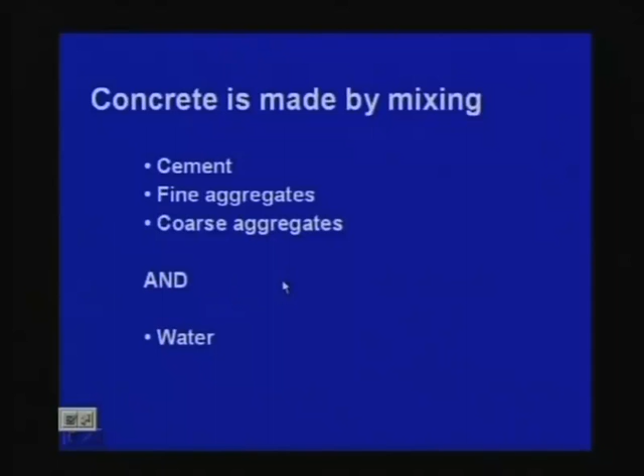As I told in the last class, concrete is made by mixing cement, fine aggregates, coarse aggregates and water, and I showed the proportion schematically: coarse aggregate, sand, cement and water. I already told this last class, just to repeat one or two slides.

We shall come to workability. This means the fresh concrete, or green concrete, can flow. You can mix it, put it in any way, and get any shape. So it should be workable. If you add less water, it will be almost dry, and you cannot get the required shape; it may simply break. If you have more water, it can flow like a fluid, and then also it is difficult to get the proper shape. So workability is very important so far as concrete casting is concerned.

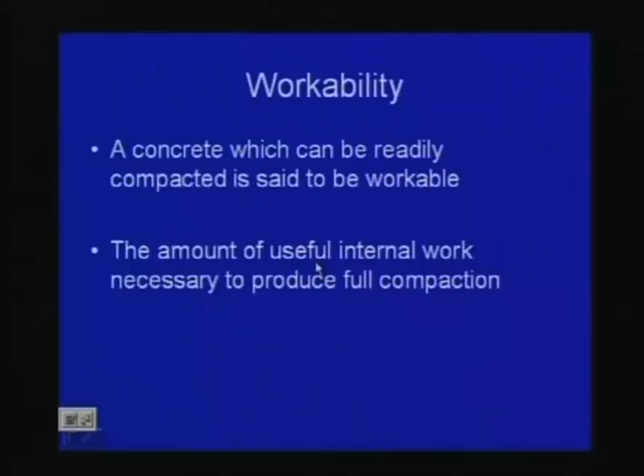So workability means a concrete which can be readily compacted is said to be workable - the amount of useful internal work necessary to produce full compaction. By useful internal work, we mean the friction between the aggregates whenever you are compacting the concrete, as well as between the aggregates and the formwork where you are placing the concrete. The amount of internal work required determines the workability.

Now according to the ASTM definition, a very standard code definition of workability: the property determining the effort required to manipulate a freshly mixed quantity of concrete with minimum loss of homogeneity. This means for concrete with coarse aggregates, you can make it so that it will be homogeneous - that one portion will not be only coarse aggregates or only sand, but the whole concrete should be homogeneous. That is the ASTM definition.

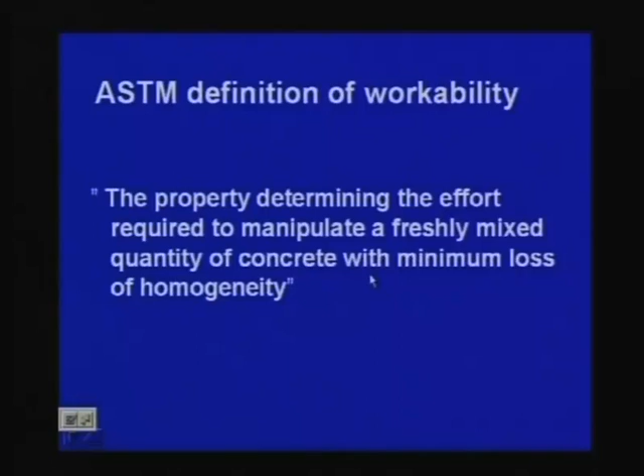We can also look at the American Concrete Institute definition. The ACI definition of workability: the property of freshly mixed concrete or mortar which determines the ease and homogeneity with which it can be mixed, placed, consolidated and finished. These are the two important bodies so far as materials and standards are concerned, ACI as well as the other one.

Let me repeat once more so that it will help you to note down: property of freshly mixed concrete or mortar - it can be concrete as well as mortar. Concrete means cement, sand and coarse aggregates; mortar means cement and sand only, fine aggregates. Mortar is used for placing bricks and for plastering, which determines the ease and homogeneity with which it can be mixed, placed, consolidated and finished. Finally you get the finished product. So that is workability.

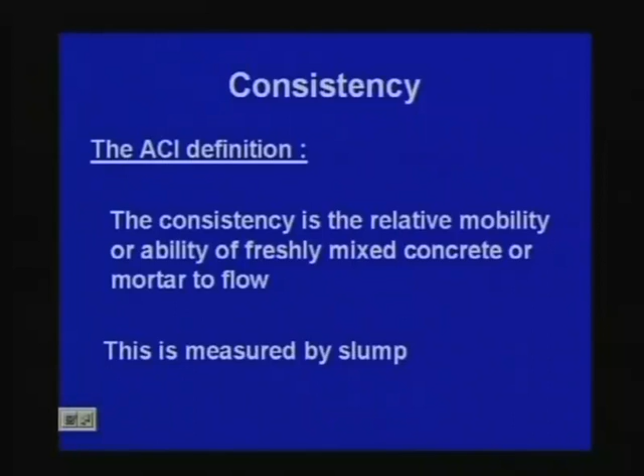So, measurement of workability by slump test is used extensively on site. We are talking about site, after all the concrete is cast on the site itself. So, we have to find out the workability from the slump, and the slump test is used extensively in site work all over the world. So, we use this particular test extensively.

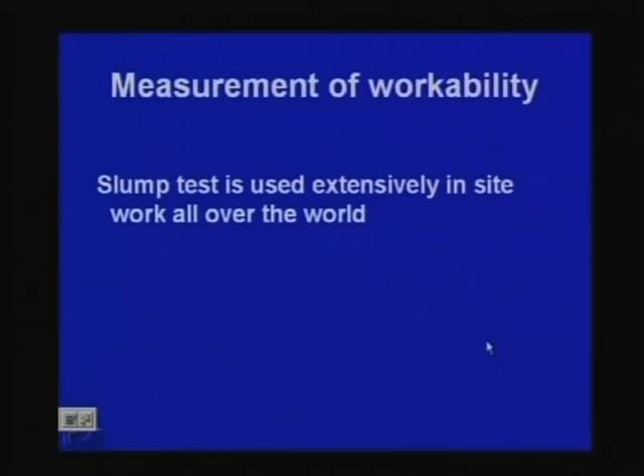So, what is the slump test? The mold for the slump test is a frustum of a cone 300 millimeter high. It is placed on a smooth surface with the smaller opening at the top and filled with concrete in 3 layers. I repeat, the mold for the slump test is a frustum of a cone 300 millimeter high. It is placed on a smooth surface with the smaller opening at the top and filled with concrete in 3 layers.

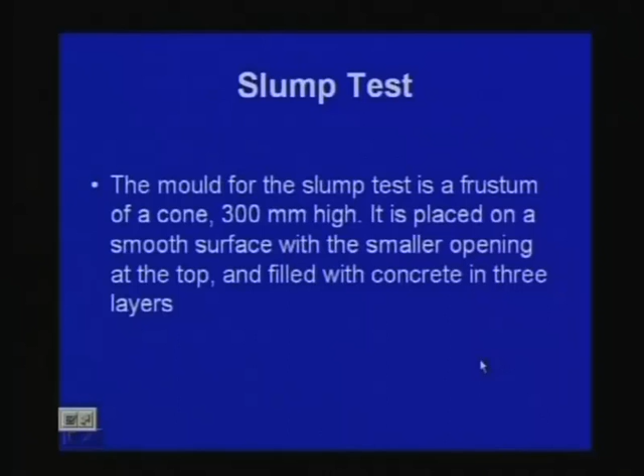This is a smooth surface, and a slump cone. You are pouring concrete through this. You have to pour in 3 layers, and we have to make 25 strokes. Each layer is tamped 25 times with a standard 16 millimeter diameter steel rod, because we have to do some kind of standardization.

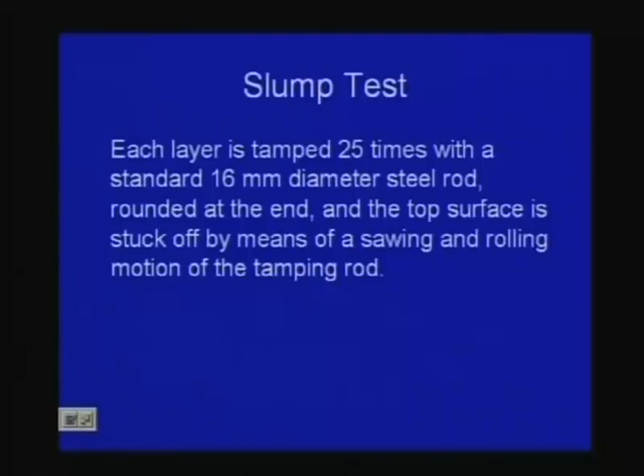On the basis of that one can design and achieve the target strength, and that could be used for actual work at site. This is not required for design, because in design we say okay M20, but before that we should know where we really stand. That is why I am keeping this class for materials. So coming to this point, we can do the slump test, and what I have already told, I shall not repeat.

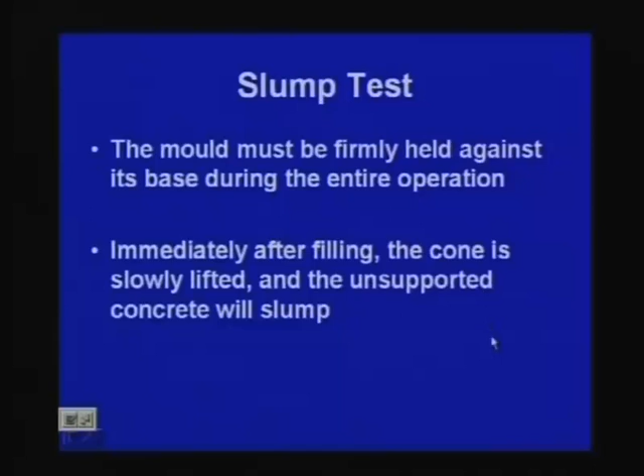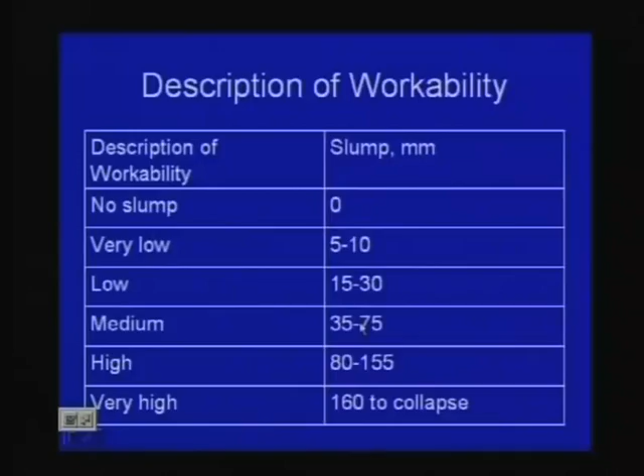So that means it is very high, obviously it is easier to work with. When it can flow, it is very high workability. So this is how we specify qualitatively, not exactly; it is not possible to get the exact value of workability, but we give the range. If we get it within this, then we consider one particular case. In other way, you can consider it as a little bit fuzzy gradation.

The other aspect is durability, because workability is one aspect, the other aspect is durability.

So, what is durability? Concrete should maintain its required strength and serviceability. Please note, I am repeating this: one is strength, the other is serviceability. These are two different criteria which go hand in hand, strength and serviceability. So, concrete should maintain its required strength and serviceability during the expected service life.

A structure is designed for a certain life, say 50 years or 100 years. So, we expect that it should be durable; at least it will withstand the load for which it is designed. Concrete is said to be durable if it withstands the process of deterioration to which it can be expected to be exposed. Obviously, the concrete cast today will deteriorate over time, we have to accept it, but even then it should withstand that, even if it is exposed to different environments.

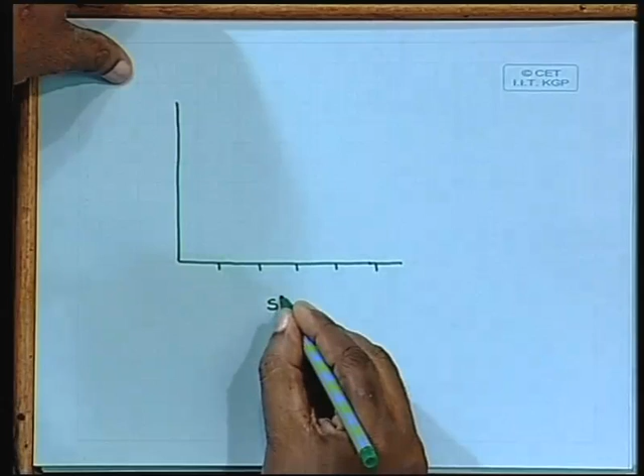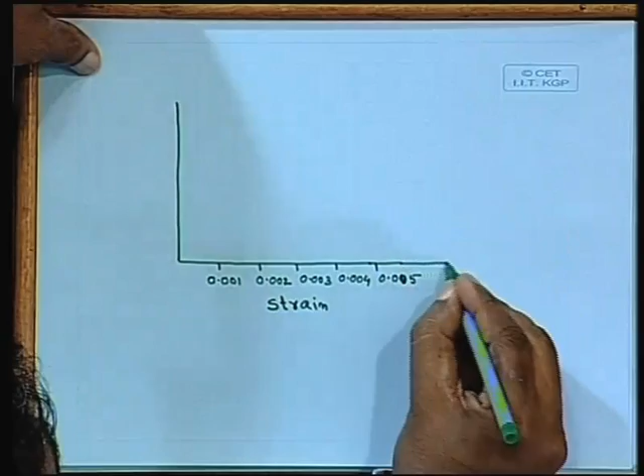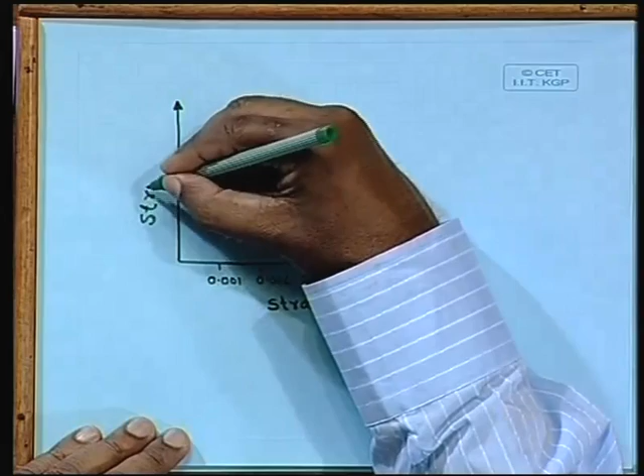So, I can show you one graph that is very important. We have strain and we have stress. Now, we have different types of concrete. If we test the concrete cubes, we can measure the stress and strain. In other words, you can find the applied load and the deflection, say for a 150 millimeter cube, how much it is compressed.

From there we can find the corresponding strain and the applied load. We know the contact area, approximately 150 by 150, because after casting it may be 151 by 152, so we measure it exactly for a particular cube. On that basis we find the corresponding stress: applied load divided by the area. From that we get the stress-strain curve, which is the important part for any material.

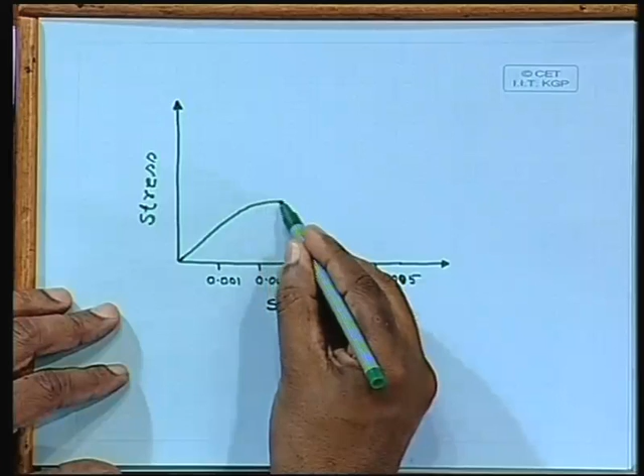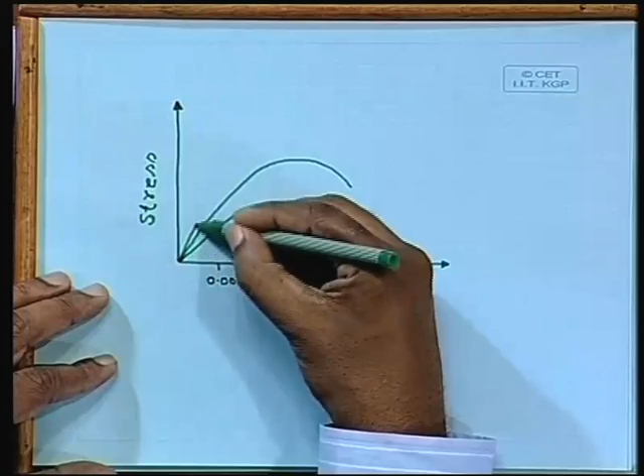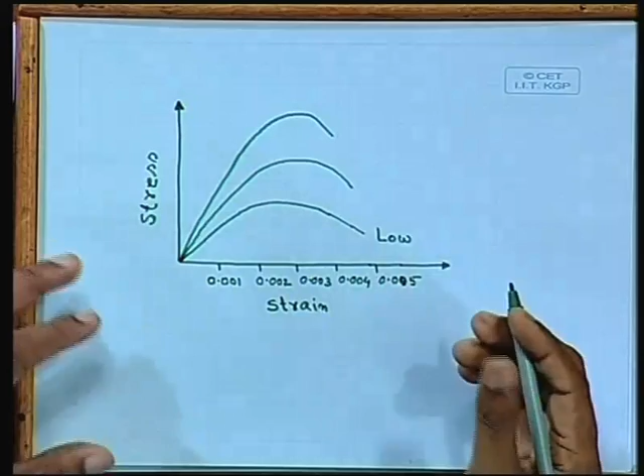Say one curve can go like this. The other one, if the concrete is higher strength, can go a little more, like this. This one we consider low strength, this one medium strength, and this one high strength concrete.

So, it is worth mentioning, generally M20 up to M25 we use for reinforced concrete. For pre-stressed concrete we take M35, M30. For concrete pavements, we use M40 grade. So, for different applications we use different strengths.

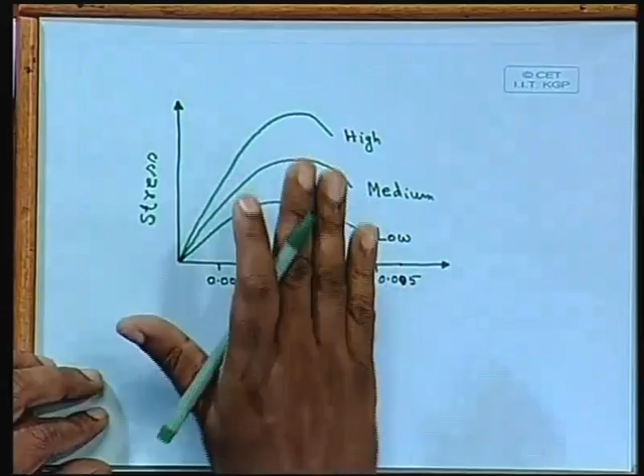Now, this is the stress strain curve. We shall use it when we go for actual design, but in actual practice if you test it, you may get this type of stress strain curve, and you can only get it from experiment, because there is no other way to find it out theoretically. For steel also you have to do it the similar way, you have to find out the stress strain curve.

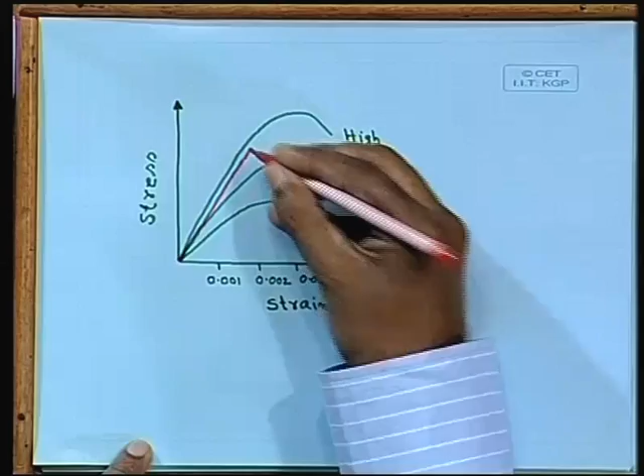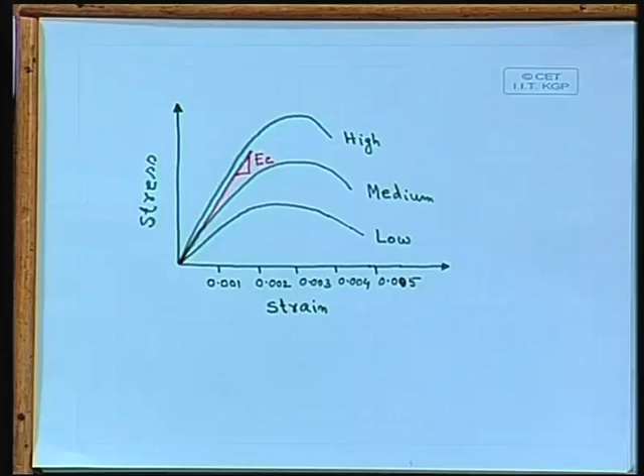And you can find out another thing, let us say for this particular one, EC, the modulus of elasticity of concrete. That is another part we have to find out. From the stress strain curve we can find out the modulus of elasticity and the behavior, because at a particular strain we are interested to find out the corresponding stress. That is very important for our design calculation, and that is why this stress strain curve is so important.

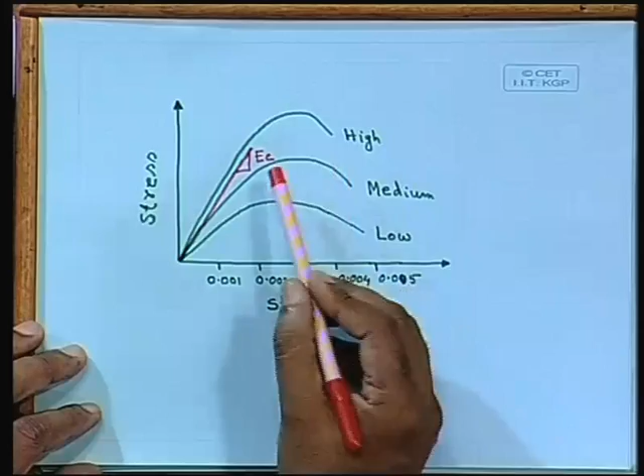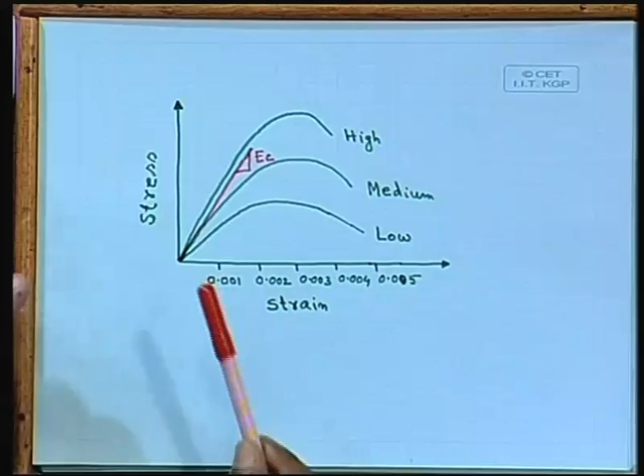So, the modulus of elasticity will vary along the stress strain curve. Yes, so we are taking the initial one, is it not? That is the one we take. If you consider the secant modulus, a lot of other moduli you will get. At different points you can find out different moduli of elasticity. But here we are considering the initial one, and that we shall use. The corresponding modulus of elasticity for concrete we shall get from IS 456.

Regarding the tensile strength, generally it is 8 to 10% of the compressive strength. For our design, we shall simply ignore the tensile strength of concrete. We shall assume that concrete will not take any tension; it will be taken care of by the steel only. One interesting thing, when we say that, what are we going to assume?

Let us say this is the section. If we look from this side, we may get a member like this. Let us say there is a bar here. Though the detailing is not like that, let us consider for the time being that this is the longitudinal section, and we have this steel bar. Though the support is not like this, let us provide the support with which we are familiar, and let us apply a load.

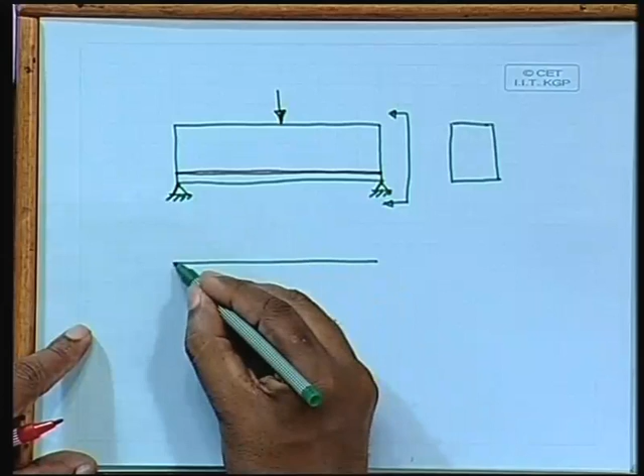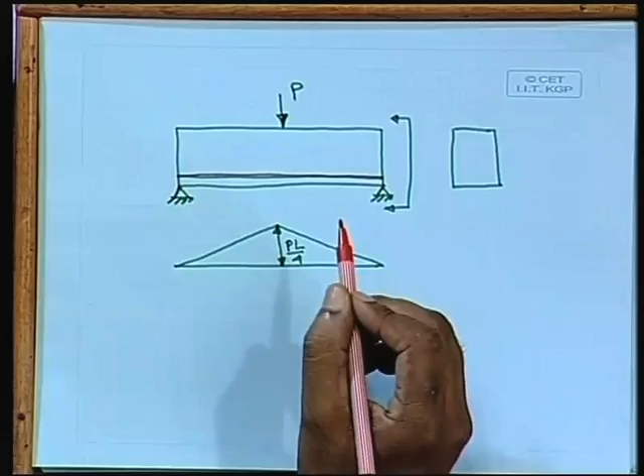Then what will happen here? We have to find out the bending moment. If this is P, then this one is PL by 4. So, if we apply this, the top will be compressive and the bottom will be tensile. When we assume that concrete will not take any tension and only the steel is sharing that part, it means that there are cracks here, there are so many cracks here.

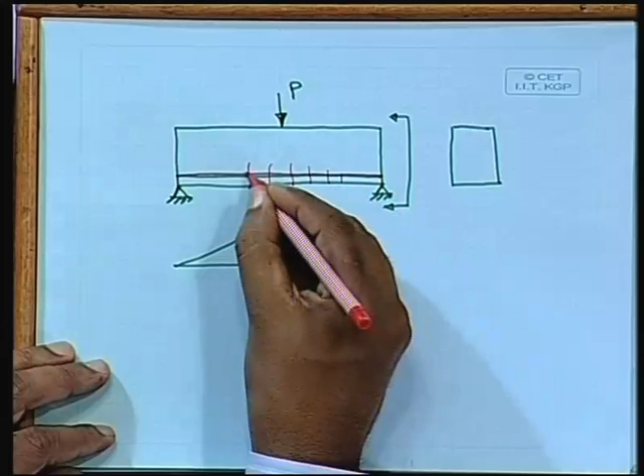That means there is no connection between the concrete. So then only I can say that steel is only taking, because if there is no crack, if it is continuous, that means concrete is also taking the load. But since I have already assumed that only steel will take, that means I am assuming that we are considering a cracked section, and the section has a neutral axis here somewhere, not the center line. Above the neutral axis it will take the compression, and whatever concrete is at the bottom will not take any tension; the steel will only take that. That is the assumption we are making for that particular case.

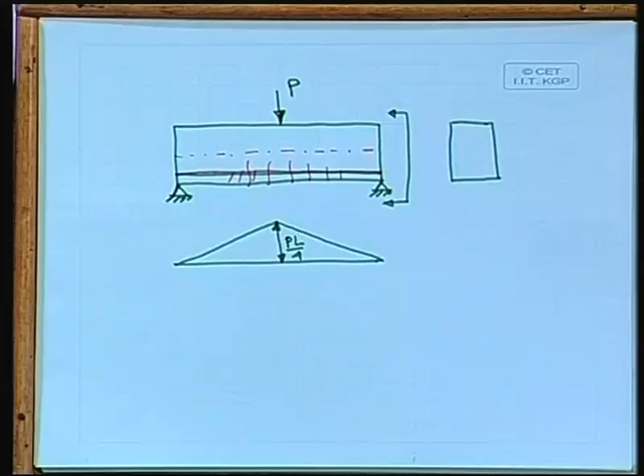But anyway, coming to this particular one, just for your reference, we can get it from experimental observation that 8 to 10% of the compressive strength is what we can achieve as far as tensile strength is concerned.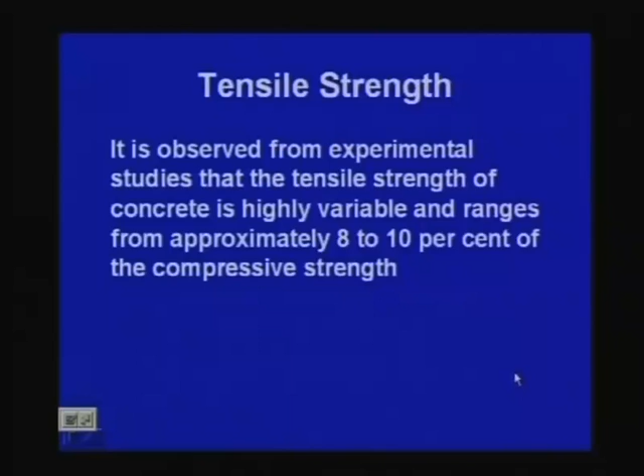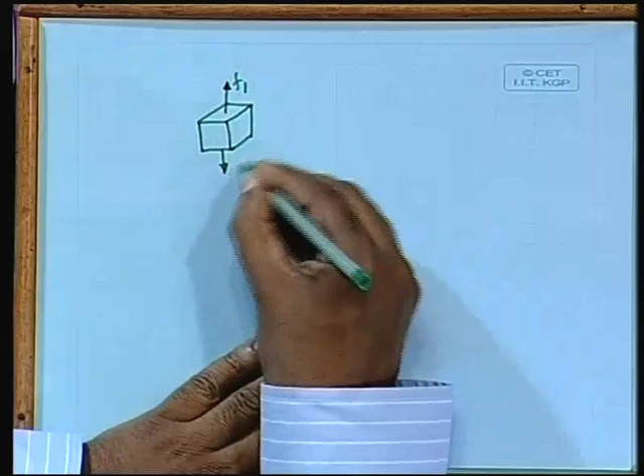Another part is called the biaxial strength. What is that? If we take one element, and then this is the corresponding stress, so in the whole body we are taking a particular point, and there we are finding the corresponding stress in two directions. So F1 and F2, these are the two stresses, and how they interact. That we can also find out, and that is called the biaxial strength. Generally we get it like this.

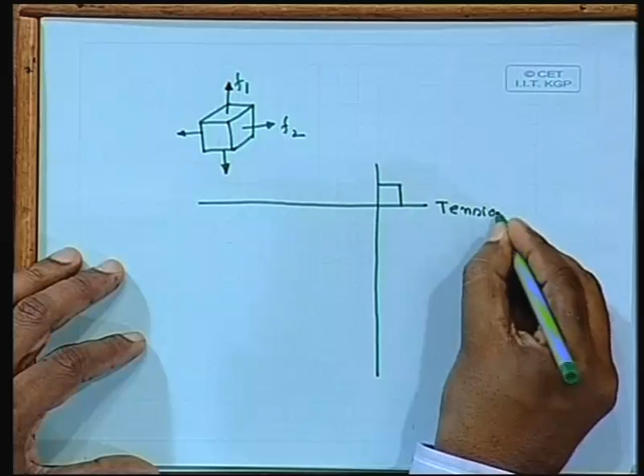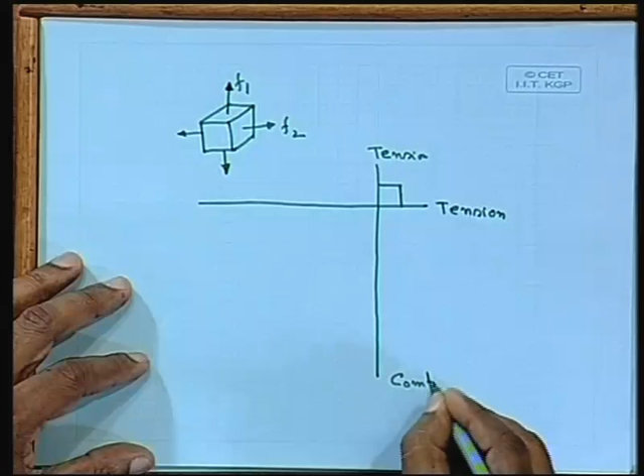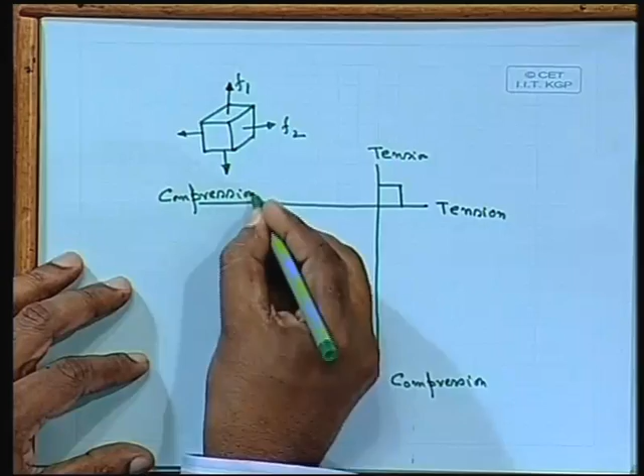We shall come to it again in detail at a later stage. Just to give you one schematic description, say this is tension, and this one is also tension. We are plotting tension, and here compression. What we shall get here, since concrete is very weak in tension, is a very small component here.

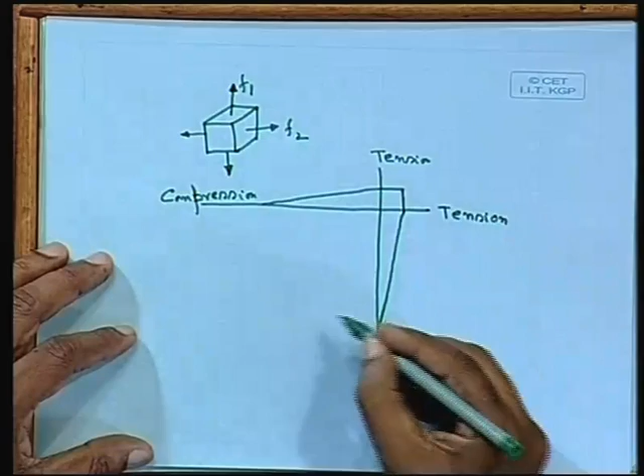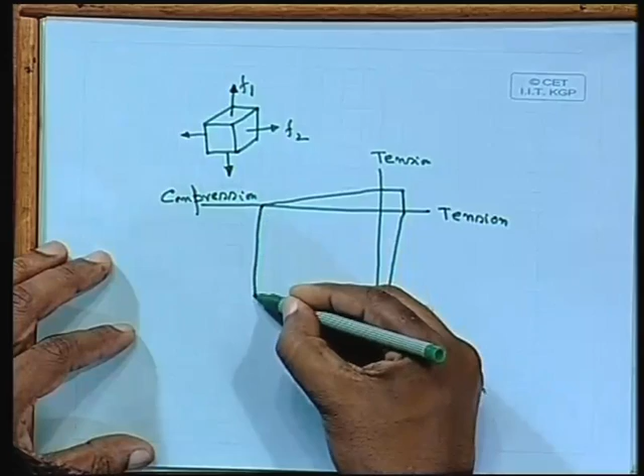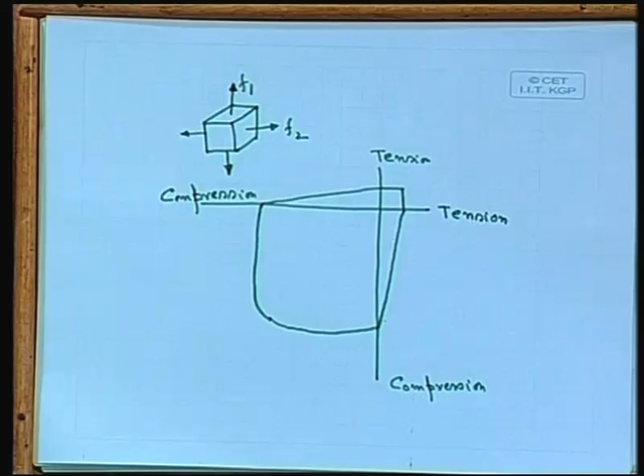The other side, we can go like this, and this particular one, because on this side, the compression side, it will be more. This is the limiting zone we are talking about. Whenever we have one element, if you remember solid mechanics failure theories, you will find there are principal stresses sigma 1 and sigma 2, let us say here F1 and F2.

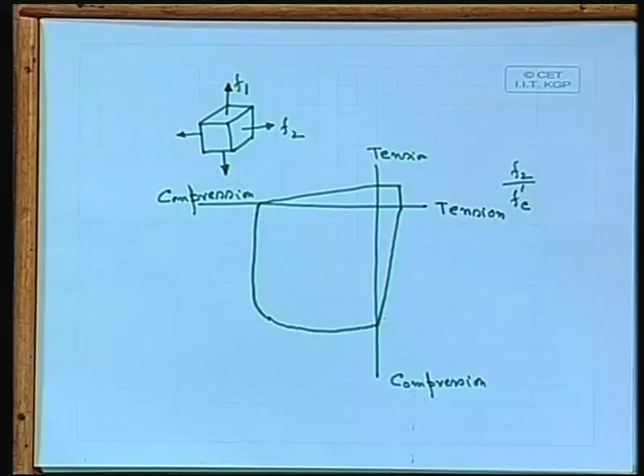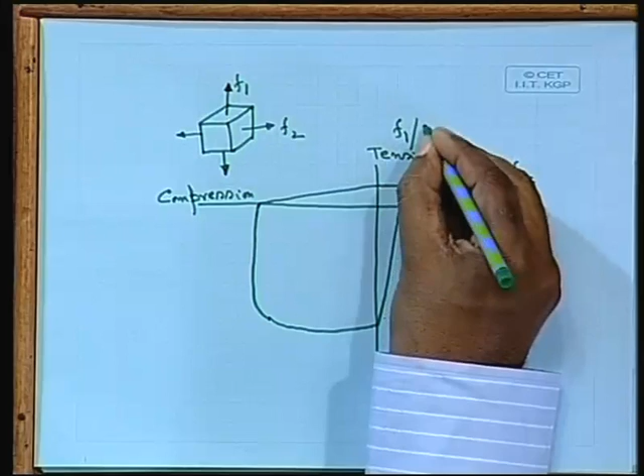Here we can make this one F2 by F dash C, where F dash C is the failure load, the maximum compressive strength it can take, which we can get from the cube strength. So this is F2 in one direction, and on this side we are getting F1 by F dash C. So we can find out the zone, how far it will go in tension and in compression.

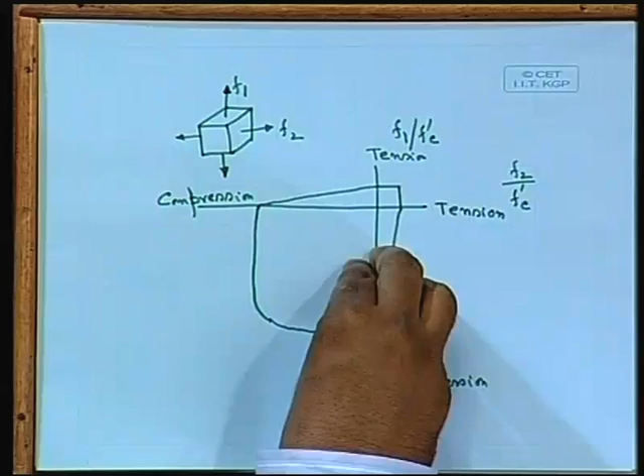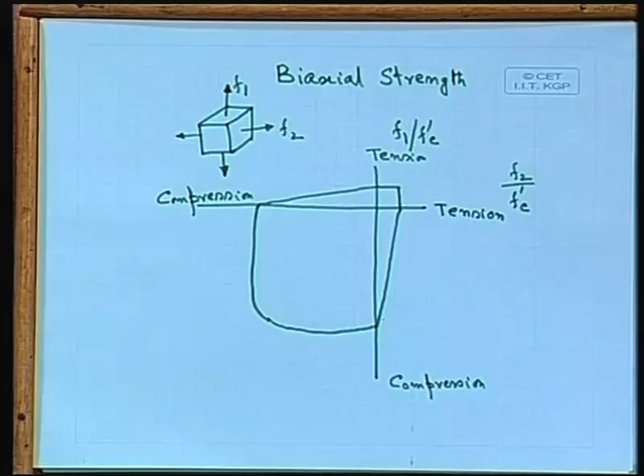Whenever we are talking biaxial, that means both axes could be tensile, both axes could be compressive, one axis tensile and the other compressive, and vice versa. So these are the 4 possible cases for biaxial strength. Let me write down biaxial strength. So far I have told you about the cube, which is uniaxial strength, because we simply apply load and find the failure load, the maximum load it can take. Now if it is biaxial, it can have compression tension, compression compression, tension compression, tension tension, all 4 possible cases.

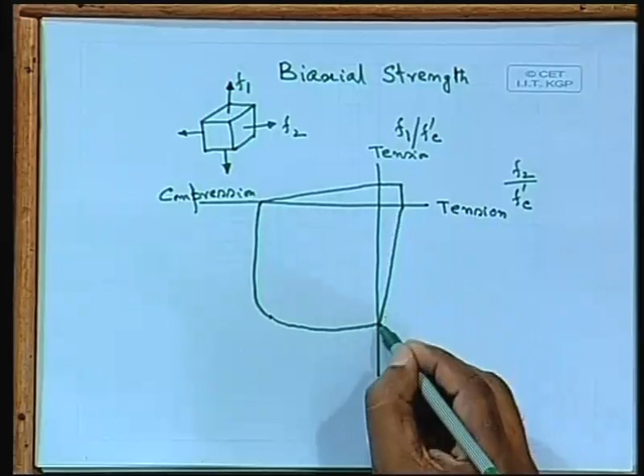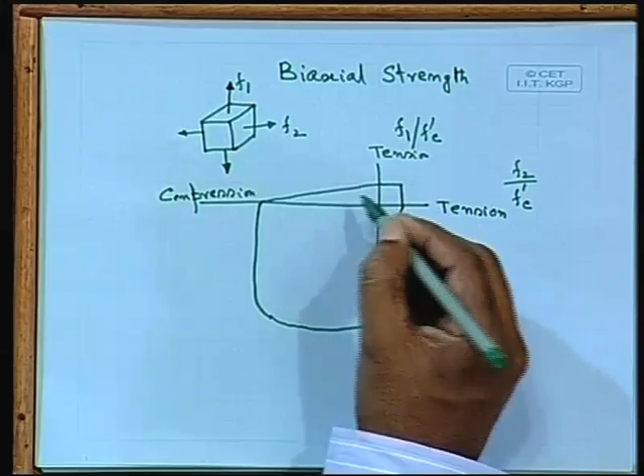Since concrete is very weak in tension, that is why you are getting a smaller zone. If it goes beyond this, it will fail. So this is the zone within which the concrete is safe. This particular zone we can say is tension compression. Similarly here, considering symmetry, tension compression, and on this side we have the maximum because concrete is very strong in compression. So this is useful where we have biaxial stresses, loading applied in 2 directions. From there we can find out the failure load.

The other important part is called creep. I have talked about compressive strength, tensile strength, then biaxial. Now we are talking about creep, which is important because it is time dependent. Both axial and bending deformations of reinforced concrete members increase with time. So deformation will increase with time.

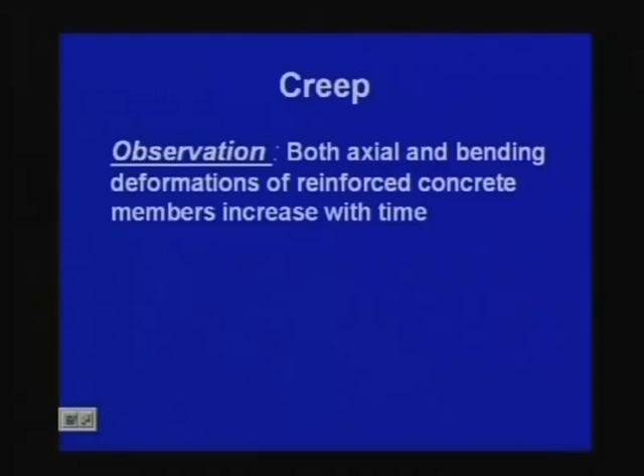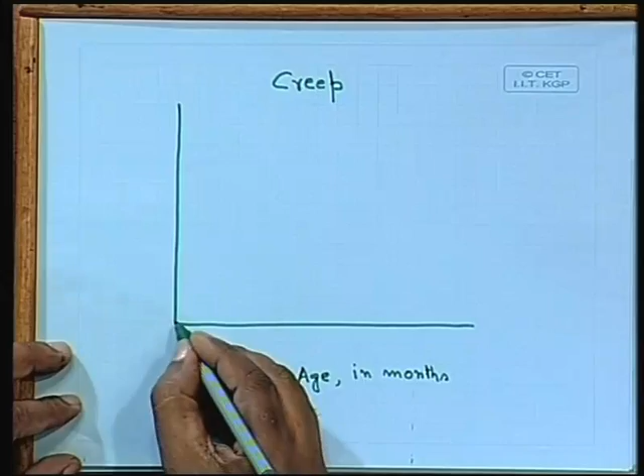I can show that with another curve. We can consider the age, say in months. Let us give the heading creep. So what happens here, we have cast the concrete, and this one is the deformation.

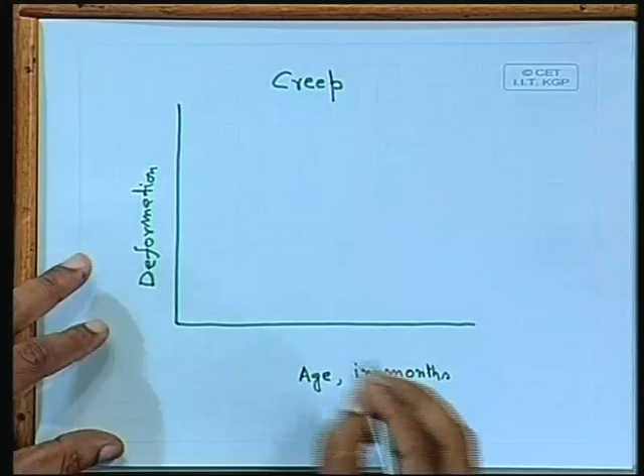So, let us start with a time axis: say 2 months, 4 months, 6, 8, 10, 12 months, like that we are going. Now what happens here is that if we cast it today, we can apply load after 28 days, that means almost after 1 month, and then we have applied the load.

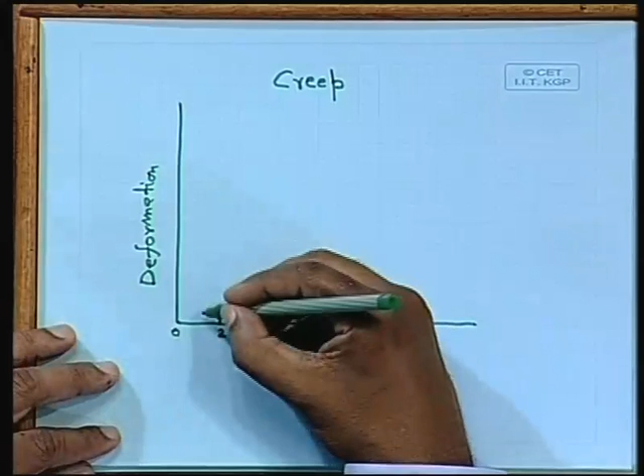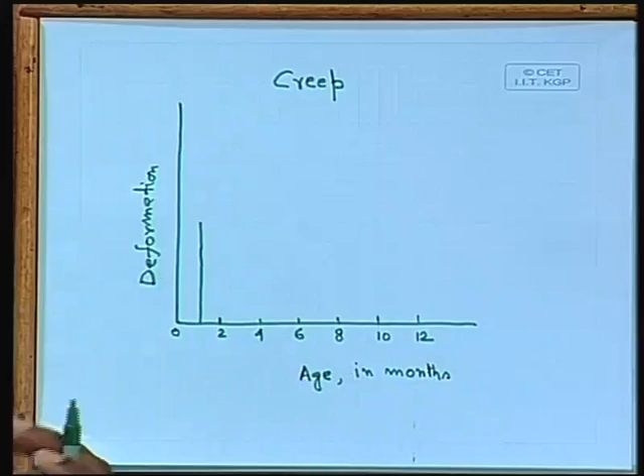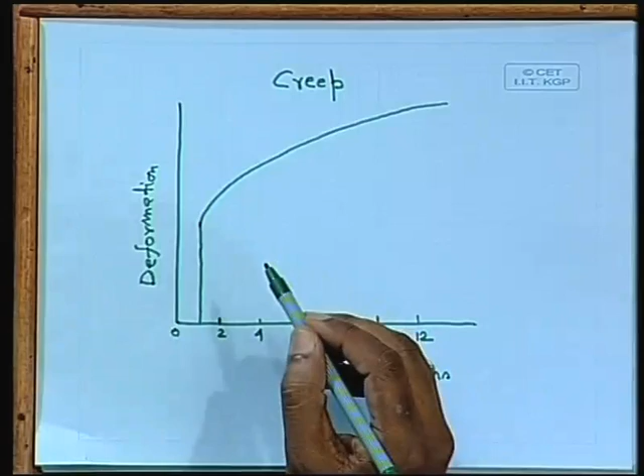Immediately there will be elastic deformation. We have applied load, so immediately we get that elastic deformation, and then over the months we may find a curve something like this. We are having a constant load, and the curve may go in that particular fashion, where it keeps on deforming. This is under constant load.

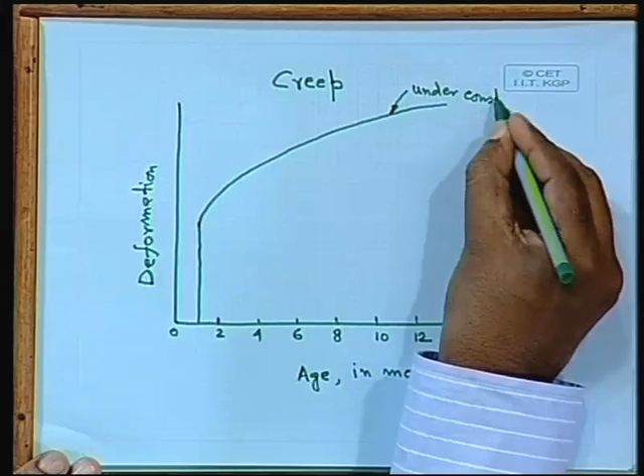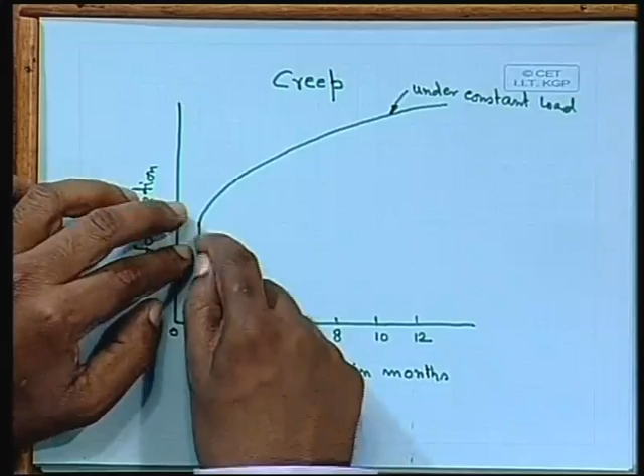So it may happen that we are considering one reinforced concrete beam, say 3 or 5 meters, and at the middle we have applied a certain load, say 5 ton. Immediately we shall get certain deformation, deflection - we can measure the central deflection, and we get this much deflection. Now if we keep that load applied, even then it will start deforming further, and that is due to creep, but the load applied is the same constant load, say 5 ton for example.

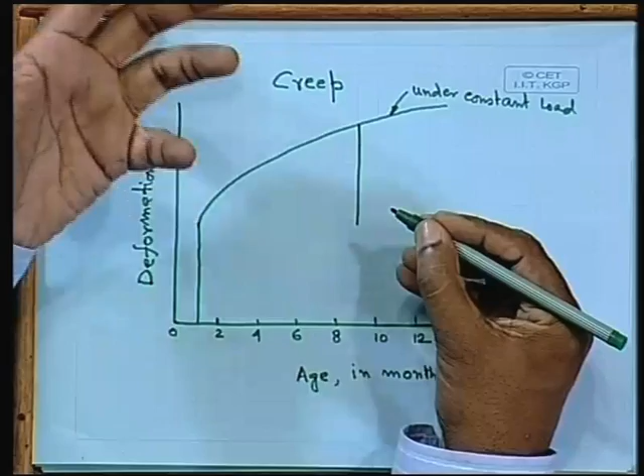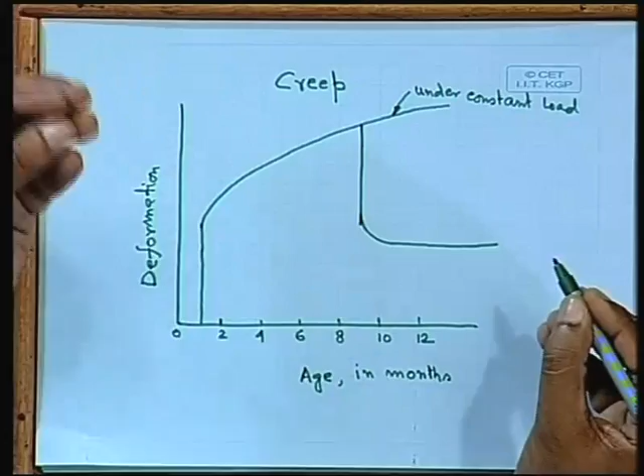Now after a few months, if we take out that 5 ton load, what will happen? We shall get the elastic recovery, but it will not come down to 0. Even if we take it out after a few months, it will not come down to 0, because if you take it out immediately then it will come back fully, but we are taking it out after a few months.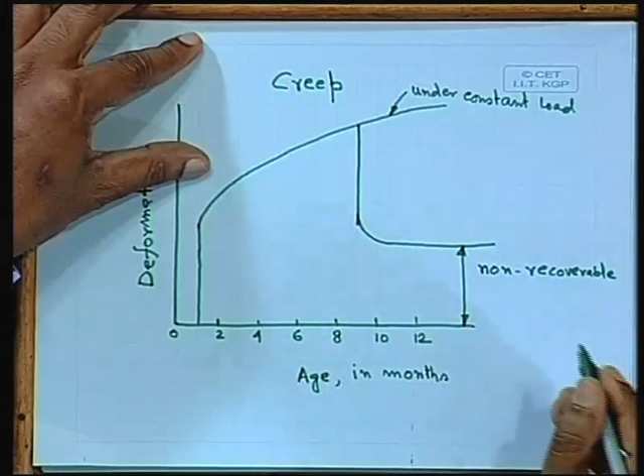So this is your non-recoverable deformation, and that we are getting due to creep, that is a time dependent phenomenon - that is due to creep.

Yes, it comes almost same. Whenever we come to that particular design, you should find it comes almost equal - you will find it in that range, and that is empirical, based on experimental observation, but we shall find out that particular aspect later on.

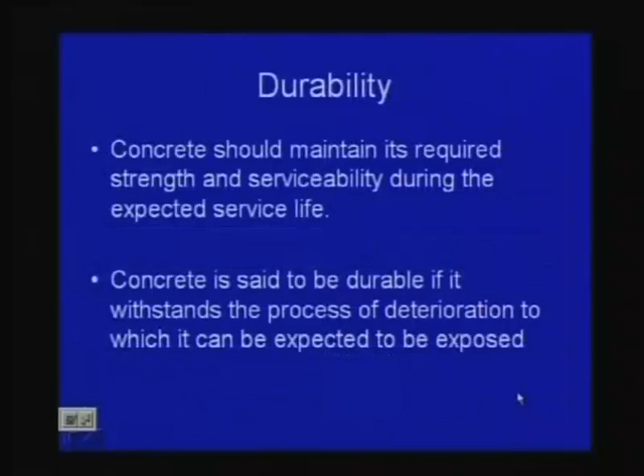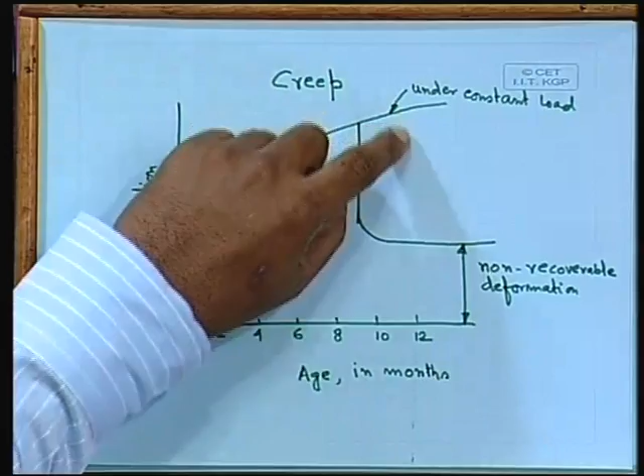So the total deformation is divided into two parts: an initial instantaneous deformation that occurs with the application of load, and a time dependent deformation termed creep that continues at a decreasing rate for a period of years. That means we have to consider at least 1 year in our calculation. At least I should start here in this particular case, say at 12 months, I should make that curve.

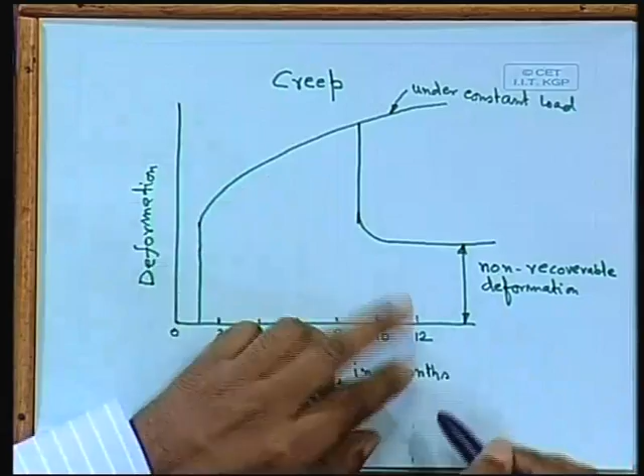So please note that particular curve which I told earlier - here we should make it at 12 months. Okay, so this is the one that we call creep. The other aspect, another one, is called shrinkage.

So this is another aspect: as the moisture evaporates, the concrete volume shrinks. The shortening per unit length associated with the reduction in volume due to moisture loss is termed the shrinkage strain, or simply we consider shrinkage. I repeat, as the moisture evaporates, the concrete volume shrinks. The shortening per unit length associated with the reduction in volume due to moisture loss is termed the shrinkage strain, or simply shrinkage.

So creep and the other one, shrinkage - these are the two things you have to consider in your calculation. Could we please see the slide in which there were two parts of creep? Okay, so one is the initial or instantaneous deformation, and the other is the time dependent deformation termed creep. So generally we consider at least 1 year for this particular one.

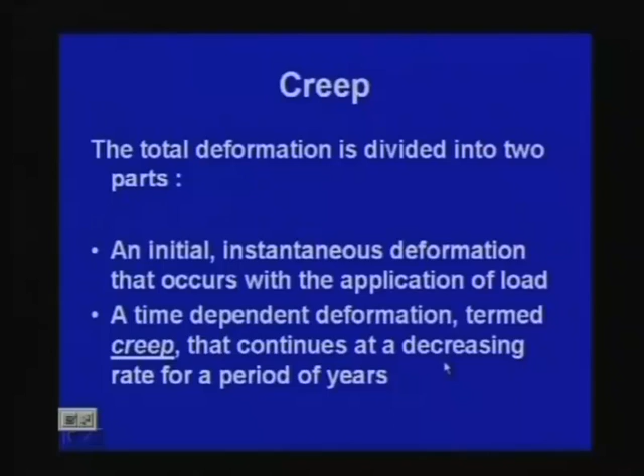So, I shall continue. Now we have almost finished the materials part, because we know that for steel also we shall consider what our IS code says.

Now we are coming to understand the limitations we have to work with. Concrete is not so simple, sometimes it is really a nuisance, but even then almost 90% of the work we do is with concrete only.

Concrete also has another important aspect, that is durability. So workmanship of concrete, if it is done properly, you can see that the work is done well.

For example, if we consider our institute main building, even though it is old, you will not find any crack there. That means the workmanship was really good. Whereas in some new buildings anywhere you may find cracks, which shows a difference in workmanship. If it is done properly, it will withstand the load and remain there for so many years, even the expected design life.

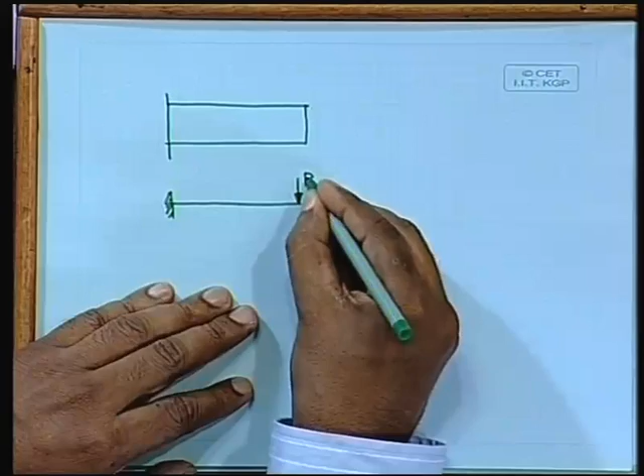We shall find out for your cantilever beam. If we consider a cantilever beam, so this is your cantilever beam, in other words you are familiar with it just simply like this. So far you have done this type of problem, and we can apply a certain load, say P.

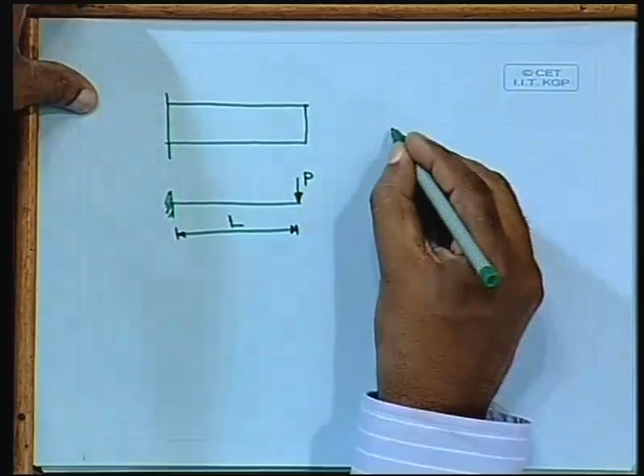When we talk about this particular problem, first we have to provide a suitable section. Whenever we talk about a beam, we consider that an element can have axial load, bending, shear, and torsion.

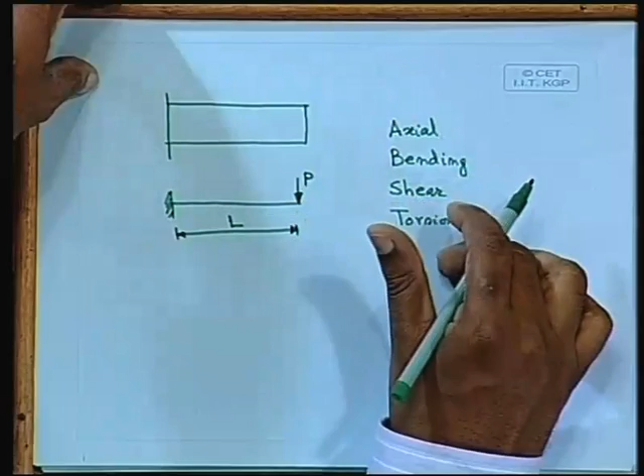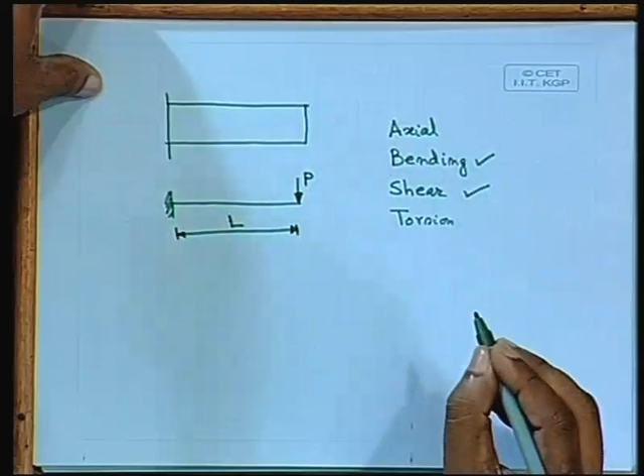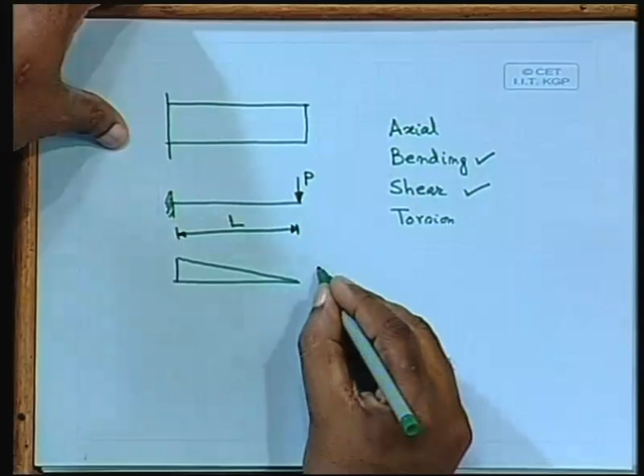Different elements, depending on how they are oriented or configured, will not necessarily take all the loads. For example, for this particular beam, the governing, dominating actions are bending and shear. So you can find out the bending moment diagram and the shear force diagram.

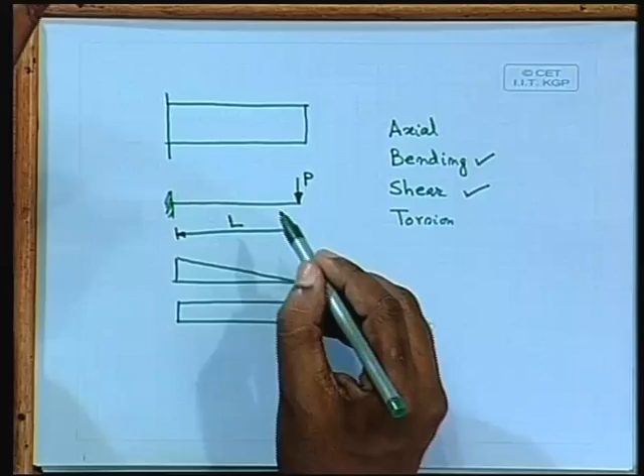So what we shall do, to take care of the bending, we have to provide a suitable section and provide the longitudinal reinforcement. In this particular case, the top will be in tension, that means you have to provide reinforcement at the top.

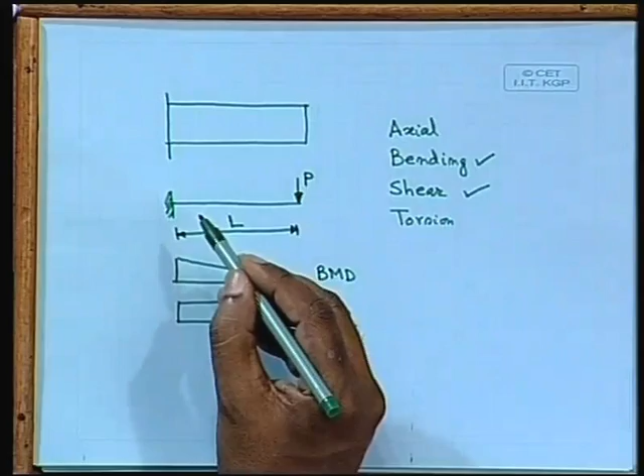Now, by mistake if somebody provides the reinforcement at the bottom only instead of the top, that means if you take out the formwork or shuttering, the cantilever beam will simply collapse, and it happens in practice too. This is called the detailing of reinforcement.

Even if you calculate correctly, still due to a mistake in detailing at the construction site, it can mislead to a disastrous end. So that is why in reinforced concrete, detailing is also important.

So we shall come to the different methods and start the design of beams, starting with flexure, that means bending. We consider bending separately, shear separately, torsion separately, we design all of them separately. So for bending we shall start with bending. Next class we shall start with bending and the different methods.